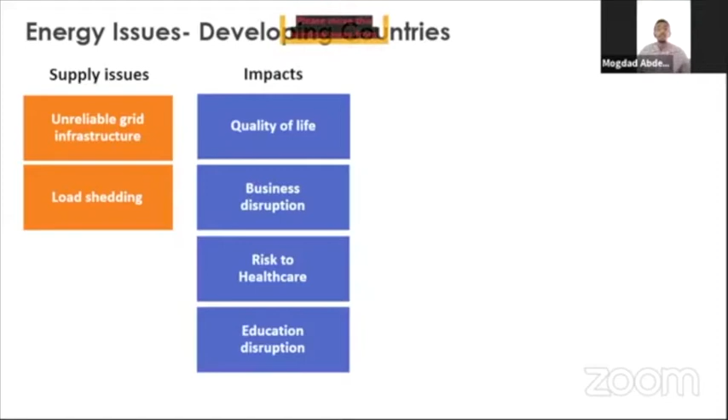So the second big problem is load shedding. We're going to speak about the consistent power outages in Sudan, particularly for these towns, and the reason behind that and the impact. In general, the vast majority of this impact affects the quality of life. We can break this down into disruptions for jobs, disruption for the national health service in Sudan, and education disruption as well. There are various issues that could be linked with the impact.

However, the reason behind that is basically political instability. Central decisions from the government could be one of the reasons leading to weak infrastructure of the grid, or generally the energy supply issue, financial difficulties, and lack of expertise. This is particularly the case in Sudan, there's a lot of lack of technical expertise. Also, one of the reasons could be unprecedented rapid urbanization, which is affecting most African countries, particularly nearby countries like Nigeria, Ethiopia, Egypt. So there's a lot of pressure on the national grid. We can talk about this in detail.

So the evaluation of options - what have we got with all these types of problems? We either have to reinforce and upgrade our grid networking, like the transmission lines and distribution lines, which relies heavily on the government, so central decisions, which is quite difficult to be honest in a modern society. If you want to implement energy projects, that will take a lot of time.

So the second option we've got is having an off-grid system, a small-scale off-grid system. Here in the UK we call it the community energy system. Basically you don't have to rely on the central government, this is a completely decentralized energy system. It could be one of the options to sort out the problem in a specific location. The consequences of this system could be lower capital cost, less political involvement because you don't need any federal government involved in decisions like small energy solutions. The time scale of it could vary from medium scale to small scale, and you would definitely use local energy resources. This is the other option we're going to go through, like the combination of small scale systems in this project.

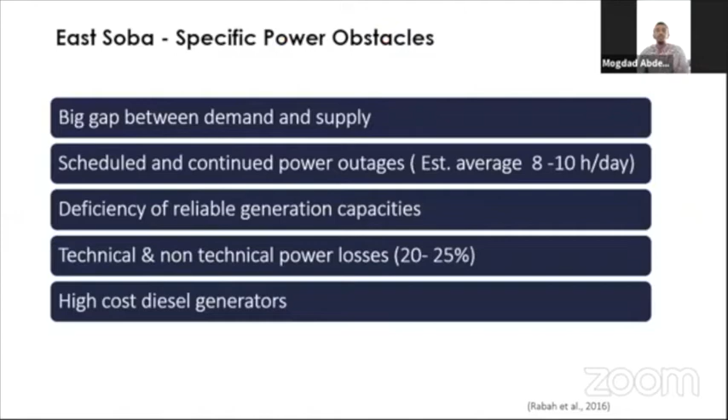The price of diesel is not quite sustainable, so we can put it as an option, but it's a problem. People can't access diesel alternative generators, so they have to rely on the only source of power, which is basically the grid.

So the case study methodology I actually followed here is basically: first you collect the data, then estimate the energy demands in the city, then analyze this demand and try to figure out any assessment of local production of energy resources, as well as modeling the energy demand and supply. That gives us a clearer picture about the supply. The last point is examining the proposed systems, which leads to the overall conclusion.

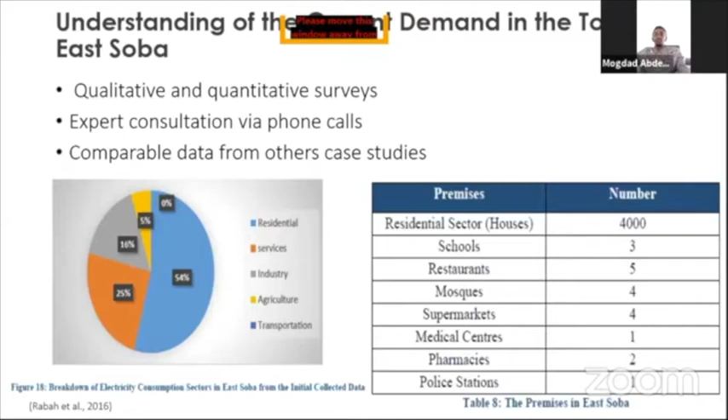When I collected the data, I had consulted an expert in this analysis. We found that I need to know the average before I can start analyzing the data - the average for a typical house in summer and winter. We found it's between 550 to 750 kilowatt hours, and in winter it's less, because in Sudan the consumption of power during summer is far greater than in winter.

Let's start with the residential sector in Sudan. We collected electrical bills for the last 12 months for 11 houses, and considered the electrical appliances for every house and the consumption behavior. You can't know the consumption behavior unless you do a qualitative survey.

So you ask about when people turn on their heating, air conditioning, washing machine, fan, oven, microwave. You need to know the behavior of customers, so we have to make assumptions as well as asking people directly.

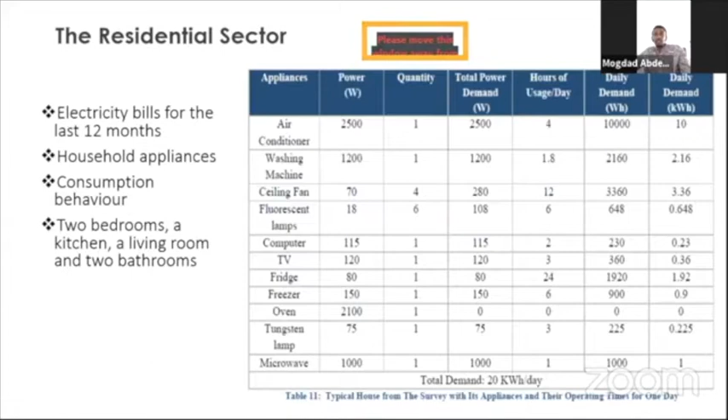Another thing is after you collect the data, you have to do optimizations. Why? Because you have to monitor the power per day. For example, during the summer, the vast majority of consumption is from 9 o'clock in the morning until about 6 o'clock in the evening, as people turn on their heating, lights, cook, and use electrical appliances, so demand jumps up.

It's the opposite in winter, where the peak of demand is not quite high, around less than 1,500 watts. I'm speaking about the peak here. It's very important through the residential demand data optimization to know the peak of the day, because when you size your system, you have to make sure it covers the peak. That's why I considered this in my hourly consumption values.

After you collect all this data and do optimizations, considering human behaviors, consumer behaviors, the appliances, and their working hours, you put it in a central database. So the total demand of the town is 27 gigawatt hours annually.

We also considered a 5 to 10% feasible fluctuation, which is like an error you have to consider. I've never seen any study or research without an error percentage. That's why it's really important that during any calculation or in the software, when you put in all this data, you make sure you have at least an error range of 5% to 10%, according to your studies.

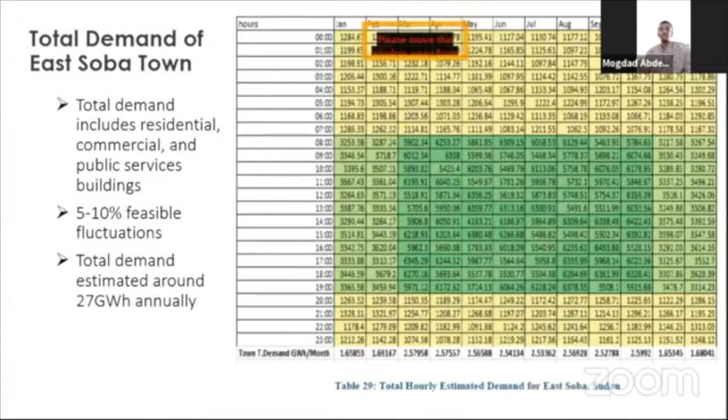So the analysis of the demand included the residential, commercial, and public sectors—details about the schools, pharmacies, and medical centers in the city. When you collect all this data and gather it into a central database, you can see the performance. Now I'm going to move to the supply side.

Before I talk about the supply side, let me consider a small point here. Yeah, let's talk about the supply side.

For the other renewable source, we can talk about wind analysis. I checked the annual average wind speed in Sudan, and it's between 5 to 6 meters per second, so it's average, not quite high. Here in Scotland, for example, in the UK, the average wind speed is more than 9 meters per second, so comparing to Sudan it's nothing—it's very high there.

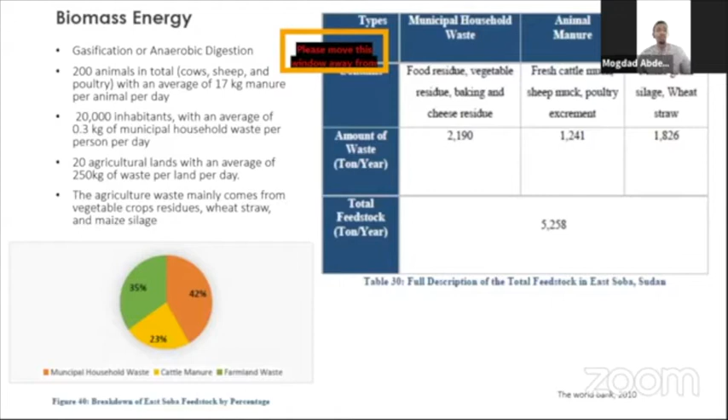The animal manure is also very important to talk about because it represents almost 23% of the feedstock in the city. And also the farmland waste — so these are the main 3 types of waste.

So we can conclude this part about the energy generation assessment. We did an assessment for solar and found it has excellent annual radiance of 6.3 — it's excellent, we're going to consider this system.

Biomass analysis for anaerobic digestion found that it's almost 5,000 tons annually.

I also did analysis for diesel, checking the price and fuel supply, and found that it's not green actually — it's from fossil fuel resources. So it will not be considered, because one of the main objectives for this study is to have sustainable resources that could be implemented as part of the system.

I did analysis for wind energy and found it averages about 5.3 meters per second. There are a lot of nearby countries that have greater wind energy than us, so it's not an option for this town particularly. It might be viable for other towns, but for this town it's not viable.

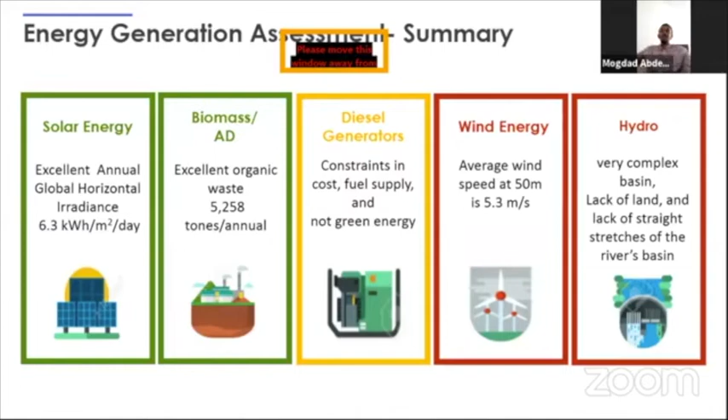I did analysis to see if there's any possibility to have a hydro dam on the Nile. It's very complex, to be honest. The reason is the basin of the Nile is very curvy, and the area is very touristic. So I don't think the government will take a decision to implement another dam in Sudan. So this is the thing — I completely neglected this part.

So we're going to focus on solar and biomass to create an integrated hybrid system that could be implemented for this town. This is just an overall analysis of the supply side.

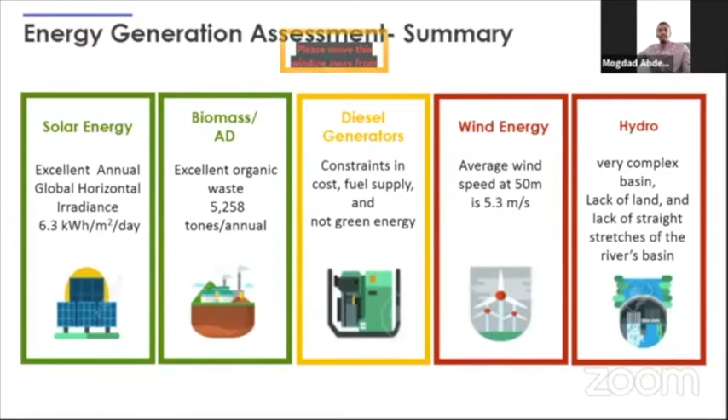Let's go to another part of the methodology, the modeling. When selecting modeling software, at Strathclyde University there was a group of doctors who did an intensive analysis of how to choose the most suitable energy modeling software. They broke it down from 51 modules to almost 15 software options, and explained the reasoning for selection.

I highly recommend this study — I'll put the link down here so you can follow it, and they give reasons for how to select an energy model. In the end, I concluded that the most important software for me was HOMER, the hybrid optimization model for electric renewables. It's an American software.

I also used AD Calculator, an anaerobic digestion calculator. This software was developed through a collaboration between Strathclyde University and a local agriculture company here in Scotland.

So I gave you the basis, the criteria for how to choose software. Basically, you have to make sure you know your generation capacity before sizing your system, to ensure you understand how your system is going to be configured — the configuration, the scale of the system, as well as the demand supply data input.

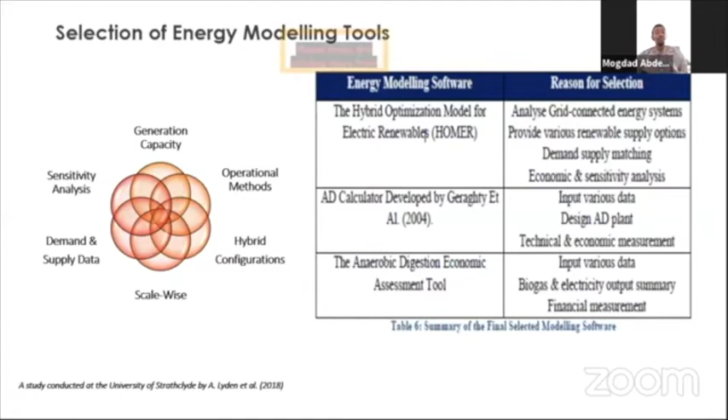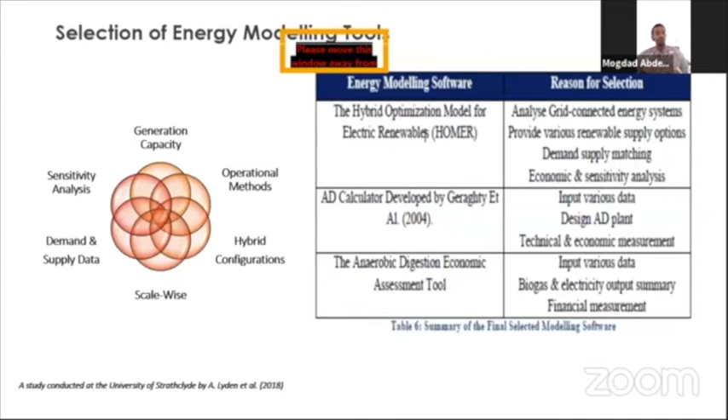So you have to consider all these details in your analysis before you choose your software. I really highly recommend this study conducted by Strathclyde University. If you are a student looking for software and you're confused about which one to go for, I recommend it for you. It's a really great one.

Let's start with solar PV, the photovoltaic. In order to have a PV, there are two types of operational systems. You either connect it with the grid, like a grid-connected method, or have a standalone solar system, without any consideration to the grid. So in this study, I've considered both. The main elements of the system: you've got the panels, the inverter, the power lines, and for the standalone system you've got the solar balance, the battery, the inverter, and the charge controller.

But there is a very important consideration for the losses. Temperature, any high temperatures over 25 degrees, will cause 10 to 20% losses. I have considered this in the presentation, as well as dirt and dust, which other studies have considered, that could block the sun. We've also accounted for DC to AC conversion losses, basically 10 to 12%.

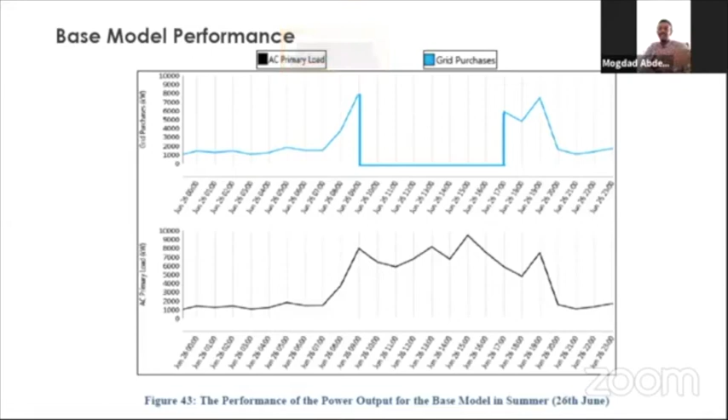We're going through the modeling and evaluation. So before I recommend any system, I did a technical, environmental, as well as economical analysis, so I have to make sure I have the criteria to analyze any system or scenario against the current grid system I've just modeled.

So these criteria about load shedding are very important. I need my system to cover at least 8 hours a day from 9 to 5, because this is one of the most important elements in the system. Also the renewable fraction, I need a high renewable fraction in the system, and the CO2 level I want as low as possible. And the cost of electricity as low as possible, and the payback period as well, and the capital cost should be acceptable and affordable for investment. So this is the important message here.

The system scenarios for this integrated system: I focused on PV and grid. Another scenario is AD and grid. Another scenario is AD, PV, and connected with the grid. And the last option is PV, AD with a battery, so I will completely get rid of the grid and see if the battery can cope with the demand. So these are the main 4 system scenarios you have to create as a researcher, to test the capability of your system to cope with the demand. I know this is a lot of technical knowledge, but it's really important to talk about it.

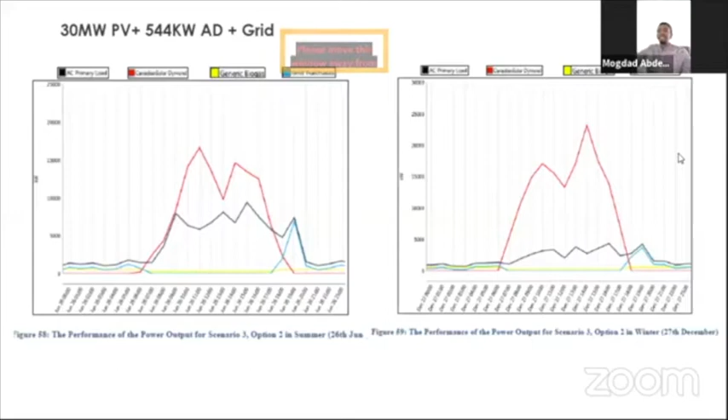You can see on the right side, in the winter there's a lot of surplus, and this is going to be sent back. As I said, it's going to be a commercialized system, so you can get money from it, but only if we change the energy policy in Sudan. I'm going to talk about that later as well. So this is just how the power performance is going.

Let's move to the last system. It's basically PV, AD, and battery. With this option, if we would like to get completely rid of the grid because it is unreliable, we are not going to rely on the grid. So let's have a battery, a big size lithium battery.

It could add more stability to the system. The ability to dispatch power at night is far greater than other types of batteries. This is a Canadian battery, one of the famous batteries in the world. So when you size the system, make sure that you have the ability to overcome the peak. Always focus on the peak, during the day.

Particularly in the summer, that's actually different from country to country. So it depends on the town you analyze, and it depends on the system you follow.

You can see the renewable fraction here is 100%. This is really good as well, so I don't need to have any reliance on the grid unless there's a problem with the battery. But in this case, there is no grid at all. So with 100% renewable fraction, the initial capital cost is $37 million, and the payback period is 12 years. So you can have a profit after 12 years. This is a good commercialized system as well for investment.

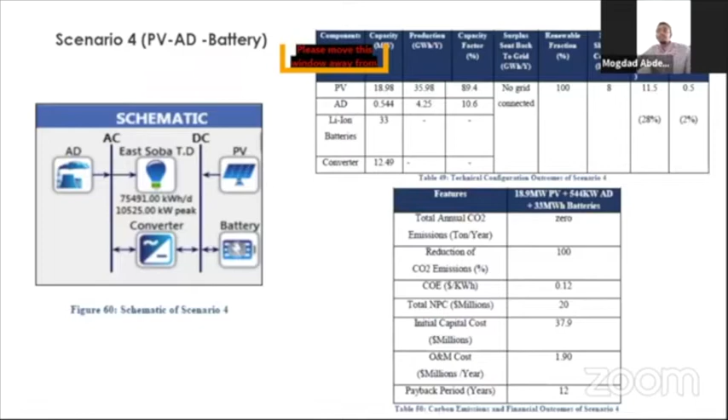There is between 1 hour to 2 hours a day of unmet load. So if I'm going to implement this system, I have to be honest with people as well, that there's going to be 2 hours of load shedding, 2 hours of blackout, either in the early morning or in the early evening. So you have to compromise at the end when you choose a system. Yeah, it's a great system, but unfortunately there's an issue with the unmet 2 hours a day.

And the load shedding coverage, as I said, the main problem in this project is people struggle every day from a power cut from 9 o'clock to 5 o'clock.

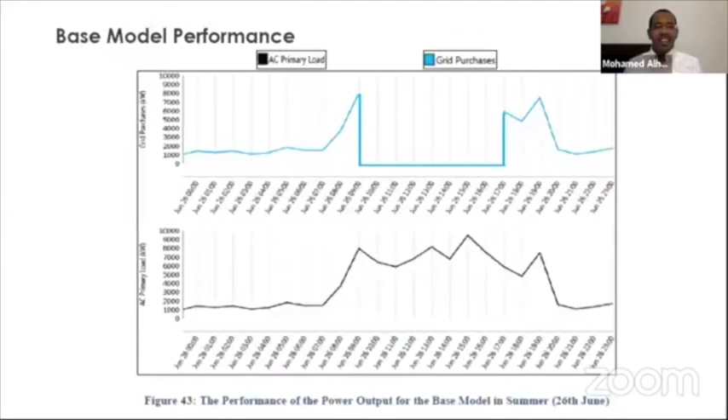And one of the things I liked, honestly, is the methodology in the beginning, where you actually explained how you came to select the technologies, through a systematic process. So impressive, the uncertainty analysis as well, honestly really good. I think if you just add a few more things, you'll be eligible to defend this as a PhD dissertation.

Great job, thank you very much. There's a number of questions actually here, and a discussion has been going on in the chat. I don't know if you managed to see it, very interesting discussion. We'll come to that. But before that, maybe this is an opportunity to welcome the new people who joined us.

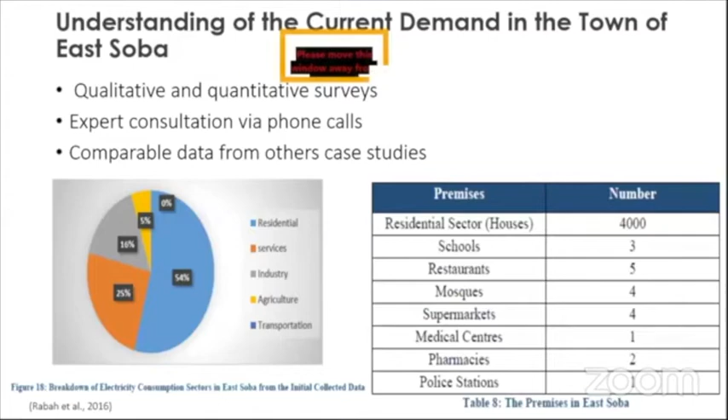We need to engage universities. We need to have programs in renewable energy, like wind energy, solar energy, biogas, just like the North American Board of Certified Energy Practitioners certifications or whatever. We need to adopt these technologies. We need to learn from countries that started this business not far away, but went through a lot of issues, like Egypt and UAE. Now they're starting to implement big projects in renewable energy.

What about the waste? No one is talking about the waste. How are we going to deal with it? No one is talking about licensing. If something went wrong, who's going to be responsible? What's the legal part of the whole equation?

We don't even have an association for renewable energy in Sudan. Even within the private sector, everyone is working alone. I personally built one of the first bigger water stations powered by solar energy, funded by Sheikh Mohammed bin Zayed in Eastern Sudan. You will be stunned when you go to these areas in Sudan.

No energy. This is a very sensitive topic, and I hope this will be the first one in a series, but we need to pick different topics to talk about. We need to talk about the training, about adopting the technologies, about the manufacturing, about the constraints from the government, the legislations. We need to learn, we need to raise generations depending on renewable energy.

There is no way out for us in Sudan without renewable energy. That's a fact. People don't get it. Diesel won't take us anywhere. Thermal won't take us anywhere. Even hydro, because the cost of generation and distribution is maybe 4 times the cost - the generation and transmission is very costly compared to renewable energy. We're talking about mini grids, micro grids that can be implemented everywhere.

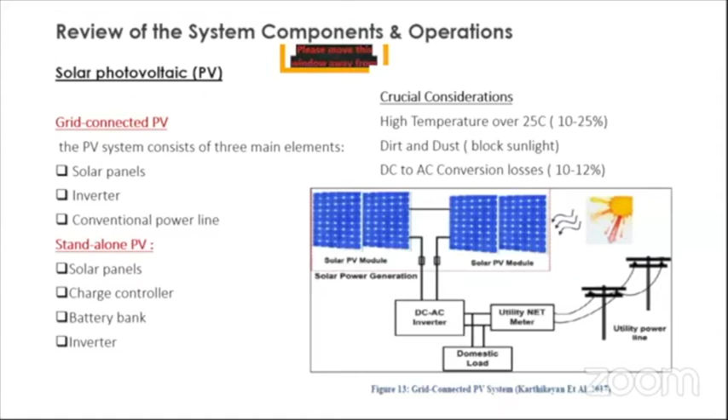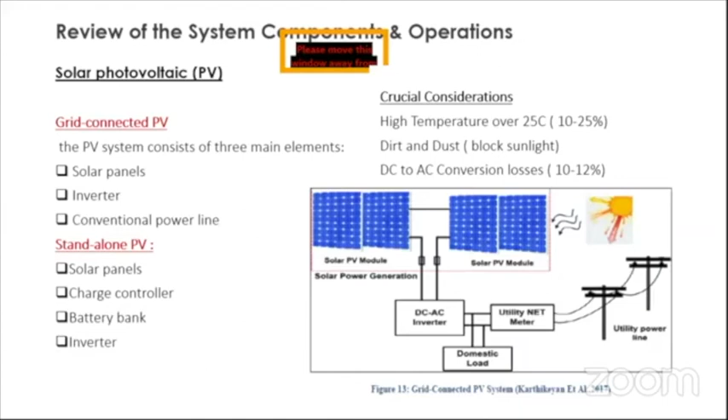Going back to the questions in the chat - one of the first questions was about biogas and how to mitigate it. I think the question means the harmful emissions from the biomass system, the AD system - were these considered in your model or anything similar in your analysis?

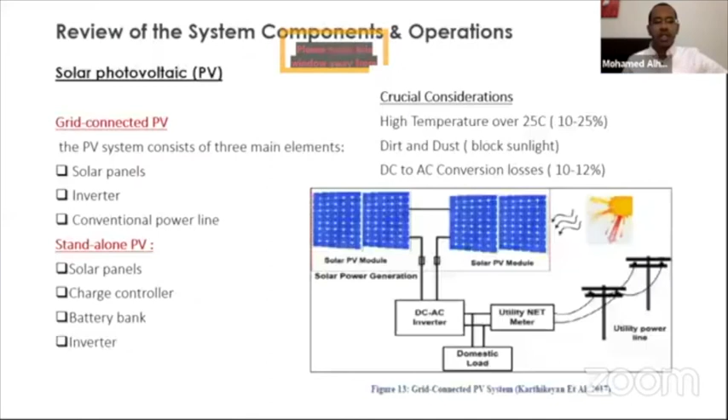I didn't get the question very well, actually. So the emissions from biogas, H2 emissions? I don't know, I think it means H2S. I didn't get it either. It's in the beginning, from Mohammad Abdul Dafi. Yeah, he was asking how much H2 is emitted in biogas and how to mitigate it.

The way of mitigation, I haven't actually put more information about it in my project, because I relied on the software rather than the actual mitigation process, since I'm not specializing in that research area. The most important thing for me was to have at least 60% methane, so the others could be additional. I didn't focus enough on how to analyze or mitigate the CO2 or the H2S specifically. So that's the point in terms of the research.

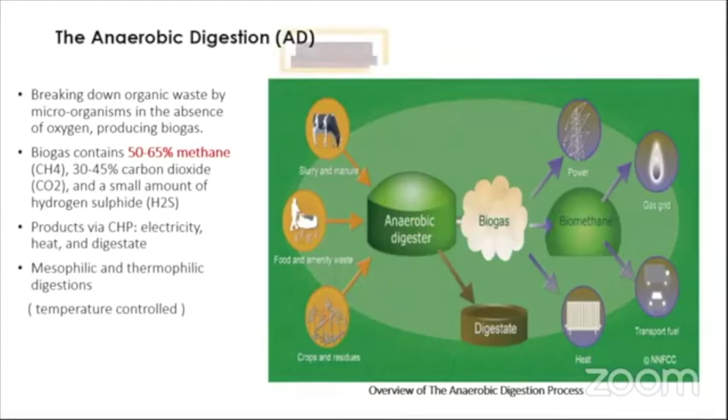Hi, Engineer Mogdad, it was a really great presentation. I was reading your thesis today itself and really enjoyed it. I'm a co-founder of Clean Energy for Africa, working with Dr. Mohammed, here in Sweden within the African European Development Agency. And it's about time, as Dr. Mohammed Babikar said, to get renewable energy in action in Sudan. It's great having such studies, especially since we're all suffering from these blackouts in different cities, and I guess East Soba is not different from other small towns in Sudan, and that's even true in the capital as well.

So yeah, great work. I've got a couple of questions. For the net present cost, how many years was it, for the project life itself? Okay, go ahead.

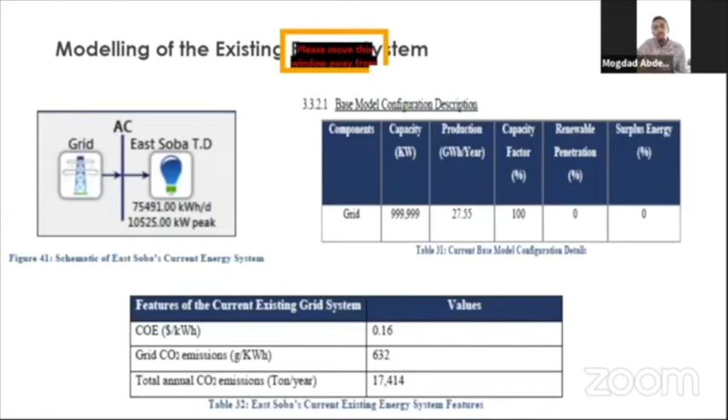For the net present cost, we standardized the system for 25 years, so this is the lifetime of the combined system. So you're going to start getting the profit after waiting at least 25 years. It's a long lifetime, but it's actually typical internationally, between 20 to 25 years. Most renewable projects are between 20 to 25 years, so my project was 25 years lifetime.

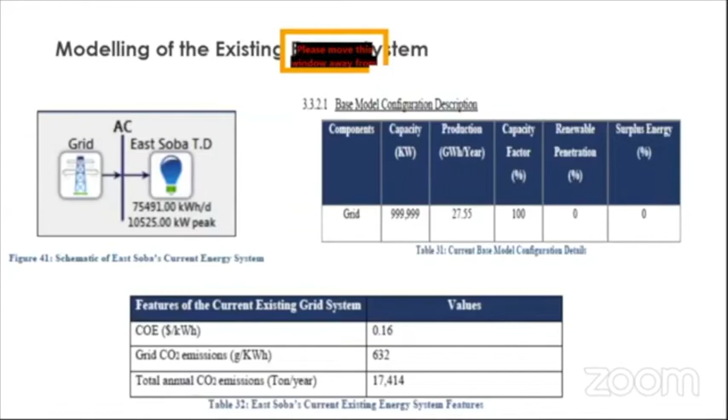Speaking about East Soba, it's a typical town within Sudan with 20,000 inhabitants. So where do you draw the line? If you've got a grid which is totally unreliable, where do you draw the line to make it a totally off-grid system, not relying at all on any grid? Where could you draw that line in terms of maybe the number of inhabitants, the electric load, and stuff like that? I know it might not be included in the study itself, but just a thought.

That's great, Mogdad. The system basically has two scenarios. For the one that works with the grid, the PV is connected with the grid, so any surplus is sent to the grid. What I mean by grid here is the distribution lines going into the city. I found in the study there is a substation, you have to send it to the substation first before you can send it to the line, just to step it up with transformers and send it to the line. So the system wouldn't work without a substation, it has to absorb the surplus power first and then send it back to the line going to the city.

Exactly. And in cases where there are places within Sudan, towns and cities, that don't have any grid at all, totally remote, where would you draw the line there? Would you think going totally off-grid would be the most suitable solution? I think it would be the most suitable solution.

Yeah, that's an important point. The thing about the Sudanese grid is its ability, we have to testify to the ability of the grid to accommodate more power. Renewable energy is basically stochastic, power generation goes up and down, fluctuating a lot, so I have to make sure any power going to the grid is able to accommodate it. We have a problem here in the UK, for example, the grid going from Scotland to England has a lot of problems. There are a lot of discussions about the ability to absorb more offshore wind turbines coming to the grid, and one of the solutions is to have a smart, automated system, shifting the demand up and down, so when we have a lot of power coming to the grid, we put the demand down.

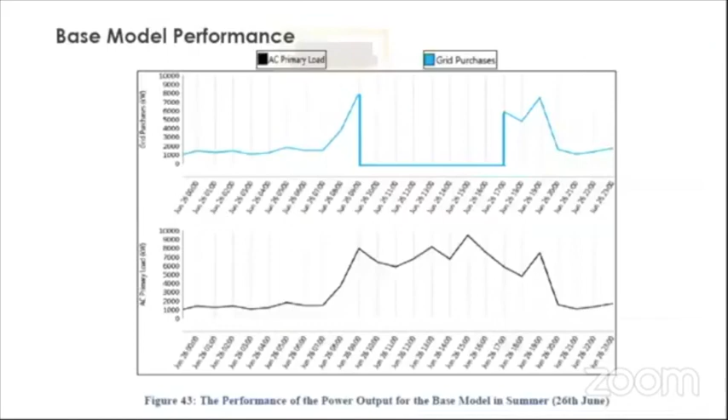My name is Ismail, Assalamu alaikum rahmatullah. I've worked in the national grid in Sudan and the control center, and I moved to Dubai Electricity, and I got my master's from Bath in electrical power systems, and now I am in the national grid here, so control center here. First of all, I'd like to commend you for a job well done. This is very impressive work, and this is actually a full package for a system to be working in Sudan, and this is a true challenge for the load shedding in Sudan.

So you have wondered about the grid's ability to take a system of this size. This is actually a good question, yes, you need to go find out about this. But my question for you is about costs: are you considering government subsidy, or are you considering the local community, or are you considering the private sector maybe in Sudan as investors, local investors? Because so far, I don't think there are any foreign investors interested to work in Sudan, and so far there are no real regulations regarding an off-grid system or the integration of renewables onto the Sudan grid.

Okay, so yeah, thank you, Mr. Ismail, I appreciate your question. So in terms of who I'm talking to, I'm actually putting the project a bit more on foreign investments, trying to approach them in a way that says, let's have communications, let's have a collaboration with the government to implement this system. But the government has to put a condition as well, has to open up the investment, not take it exclusively. The price of electricity is really very cheap at the moment, so you need to make sure that if you have an alternative, competitive system, you put the policy for the price to encourage other investments, other companies from outside Sudan, so they could come and invest. So this project is mainly focused on foreign investment, because I can't rely on government subsidy, unfortunately, at the moment.

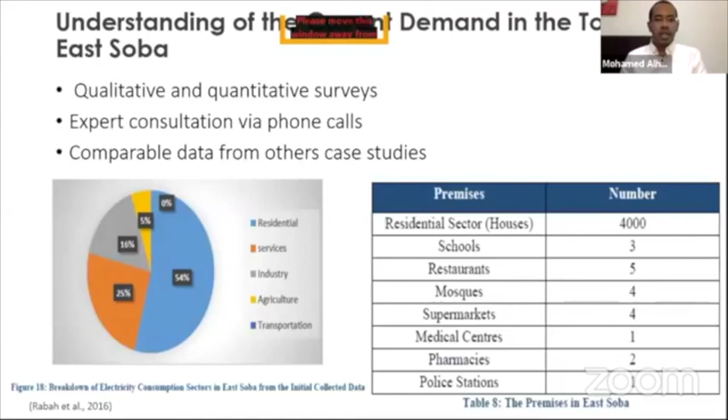Hatim asked one of the recent questions: in the beginning of the presentation you mentioned that wind energy is not recommended in Sudan due to the wind speed. He believes coastal areas like Eastern Sudan may have higher wind speeds. Is there any study or have you come across any studies on that?

Well, actually there's the UNDP program about wind energy in Sudan, one of the largest renewable energy funded programs, focusing also on wind in the eastern part, coastal areas in Port Sudan state. That's a great question - I actually didn't exclude it. You can see in the presentation I was specific. So I have to be more specific: for this town with these situations, solar is better combined with biogas than wind, particularly for this town. I mentioned the northern regions.

Usually in the Port Sudan areas there's a high chance of high wind speed, but in terms of doing analysis for wind speed, it's basically before you start a feasibility study for wind speed, you do 6 months of monitoring, like in an oil and gas system - before you go for drilling a well, you do exploration for 6 months to 1 year just to make sure there's potential. So you actually measure the wind speed at a specific height for consecutive months. Particularly for these towns, from the comparable study and the data I got, I found there is no real possibility to do that.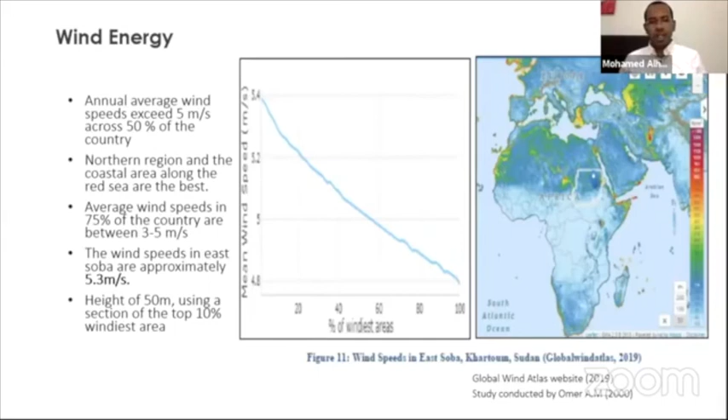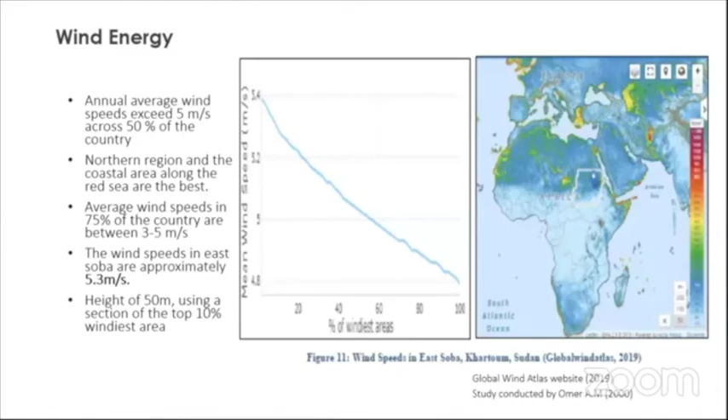Sure, first of all thank you very much Mogdad for the very interesting presentation. Unfortunately I missed the first part, but as the conversation went on it was very interesting, and it was very enthusiastic to see that we have these kinds of projects currently being studied in Sudan. This is one of the things we try to do in IRENA, the whole point of the International Renewable Energy Agency is to promote different renewable energy technologies, not only in developed countries but now with emphasis also on developing countries. So it's very interesting and I'm happy to see this is actually happening behind the scenes.

From the part that we see, we're more now dealing with the institutional level at this stage. The work that we do in my unit, the statistics unit, is to try to capture the most recent data that we have for renewable energy statistics for Sudan, and in my case also other MENA countries.

Several people mentioned on the call the issue with data availability is a really huge problematic issue in Sudan in general, but to be fair, it's not only in Sudan, it's also in other developing countries. These countries are starting to get the grasp of renewable energy technology and so on. The problem with those issues is mainly an issue that should be addressed at an institutional level. We see in other countries there are statistical laws - whenever you start a renewable energy project you register, for example, in a business registry, so there are ways to track the kind of projects happening on the ground. With Sudan, it's mainly a problem of institutions - we're just trying to get a grasp of things from the government side.

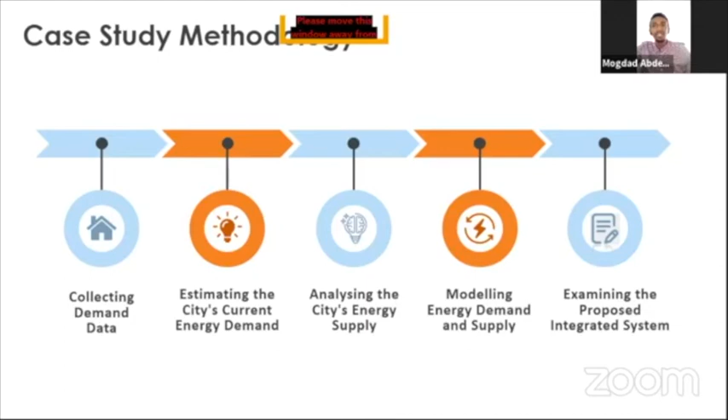Thank you. Despite the fact that there are continuous struggles, it's great news that there is a target. The Sudanese government got a target, 2030, with a 20% reduction in terms of climate change. I didn't know about that. That's great actually, and it would be impressive to publish more regulation and information about Sudan, because we don't have a central statistical database. This is the thing, we need more data, and it's great to have your comments, Nazik. That's brilliant.

Hello gentlemen, can I speak? Yes, go ahead. Hi, my name is Salim. I was really trying to raise my hand and so on, it's a pleasure, but I'm having a difficult internet. I hope everybody is hearing me, can you hear me? We can hear you, go ahead Salim.

Right, great, thank you very much. I was listening to most of the talking, which is great. I would really first like to thank you for the presentation and for the study, and I do believe it is very much doable. It's a very good base where the private sector, as was mentioned just a while ago, could pick it up from somewhere.

One of the greatest problems we are having in Sudan is actually data, and I do agree with Mohammed on that. But this is a very good and excellent starting point where we, as a private sector, could cooperate and collaborate somehow to come up with cases that the government would feel are really doable at the first stage.

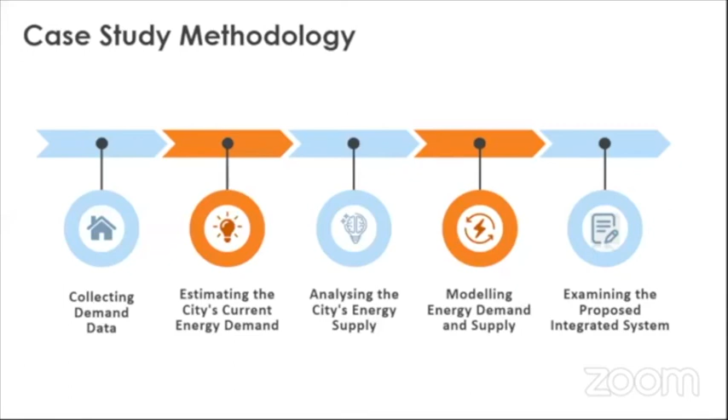And in the second stage, talking to financial bodies and financial institutes that they can finance the renewable energy, specifically on the side of agriculture or production in general. Definitely agriculture and production, or the added value of the agriculture as well, is a cash crop. As a cash crop, it's a generation of finance and money for the government, which would always be very beneficial for both sides, whether it's for the private entity, the government, or the financing body.

It's definitely a long-term investment, something between 20 years, 15 years, 25 years somewhere there, depending on the study and the capacity that's going to be needed. We all agree that we have a serious issue related to two parts, engineer—

The tariff itself. Sorry to cut you off, but I think a lot of people don't know that you are the acting general manager for the Sudanese Electricity Transmission Company. All right, okay, I see. Okay, I was the acting manager, I was the acting managing director for—

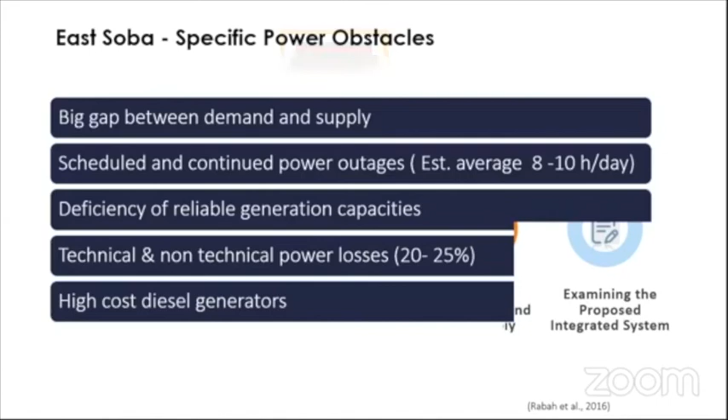I was the acting managing director for Sudanese transmission for a period of 5 months. This was actually a request from the Minister of Energy and the government of Sudan to help them put together a 5-year plan for Sudan, along with others, to develop somewhat of a vision. I had actually started working on it a little bit earlier, in 2017, on my own and out of private interest, and I was then requested to formalize it. This ended by February 2020, at which point I stopped and went back to my original job, which I'm still doing now.

I continued again, and I do believe I've understood completely that they have adopted the 5-year plan which I put together. Mr. Khairi, the Undersecretary, was talking about the government's plan, which the engineer before me summed up. I'm not working on it at the moment, but the 5-year plan is asking for an increment in renewable energy.

Mr. Salim, can you just repeat what you said, because your audio is cut off? I think the line has cut off. So sorry, I'm back again. Please bear with me, the internet is getting interrupted. Just repeat the last two sentences you said, please.

There is a 5-year plan, and a massive part of that plan is actually depending on renewable energy. It is mainly concentrated on the areas where there is production, which is normally outside of the residential areas of Khartoum. So the government very much appreciates going in that direction.

This is something I would definitely say yes, they are working on it. They are working with different entities: the UNDP, the German GIZ, the environmental bodies of the African Union, the Eastern African Power Pool. All of them are working in the same direction, and legislation is the first part, which has actually started.

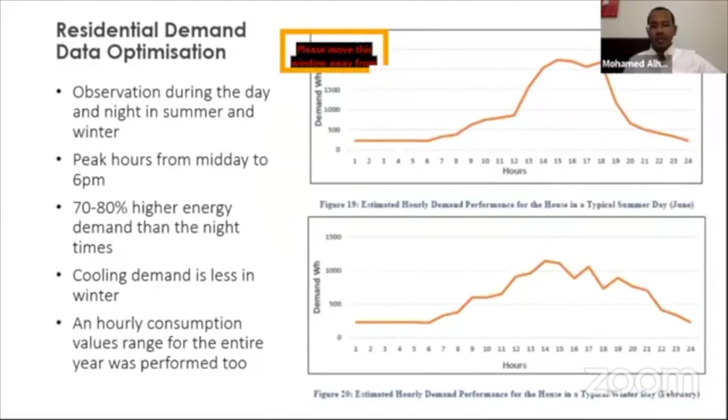So this is what I wanted to say. I'm sorry I took a long time, maybe, but I'm definitely optimistic about the future of renewable energy in Sudan, and I do believe in the next 5 years.

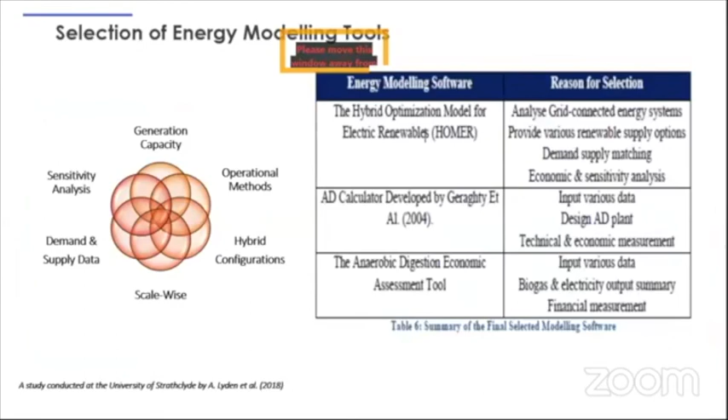I'm sorry, there is an interference of a voice.

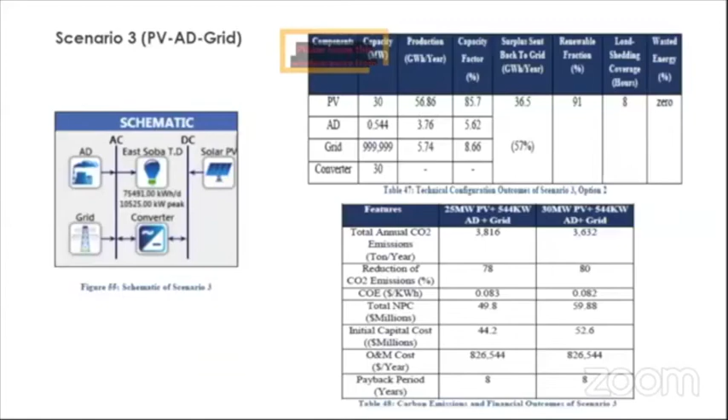I'm very much optimistic that in the next 5 years, our renewable energy generation in Sudan would definitely increase from 40% of the current capacity which we have into something somewhere between 60 to 70%, because this is the future. This is what we can do, and this is what we have to do. The initial investment, the capex, is high, but the operational cost, the OPEX, is quite low, and I think we have to do it.

It will help creating jobs. It will help improving lots of areas in Sudan which they need. It will help improving the agriculture. It will help build the added value factories that we need for our agriculture.

So I will thank you very much, gentlemen, and we will definitely have lots more discussion, and I will just leave the mic for somebody else.

Thank you. Thank you very much, Engineer Salim. Honestly, very, very insightful comments. Really.

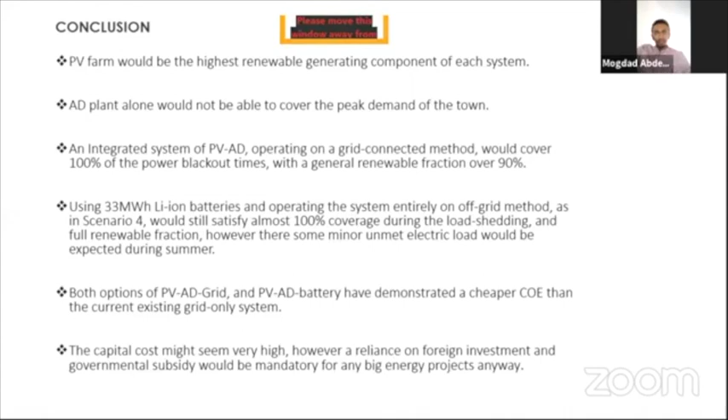Maryam, I think you wanted to say something. Please go ahead. Maryam? Maryam, do you want to add something, or is something wrong with your mic?

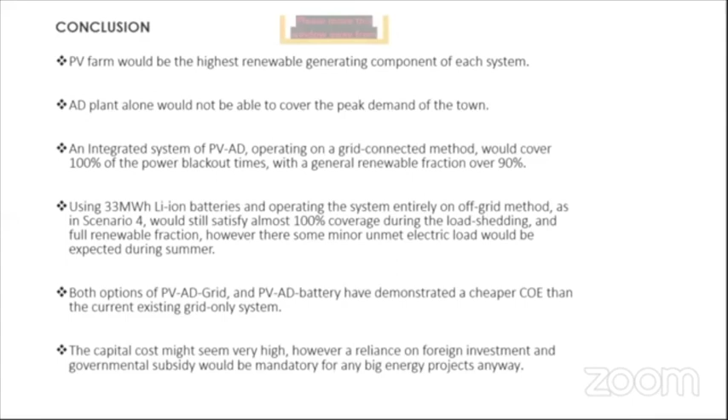If it's not clear, can you just write your comment or question in the chat, please?

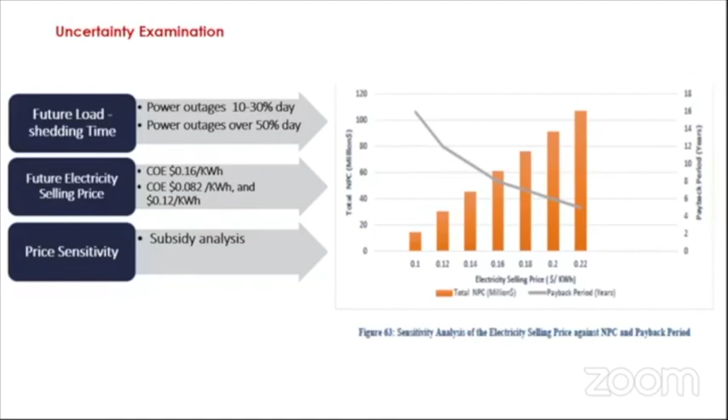In terms of the irrigations and the pumping system, I think this is not my area of expertise. I think Dr. Mohammed Al-Haj could help you out and answer this question, particularly how we can develop this pumping system, agricultural solar pumping system, combined system in rural electrification, because this is probably his area of expertise. So go ahead, Mr. Mohammed.

No, not exactly. Although we have one of our team members, Engineer Saddah, he's actually working on a small project now to evaluate solar water pumping systems. So maybe we can host him, inshallah, soon.